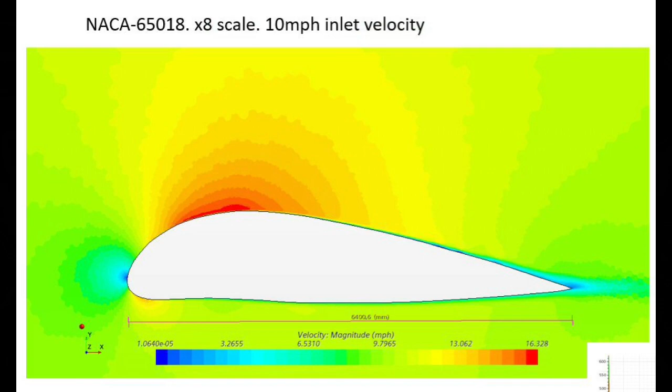The benefits of the airfoil are real.

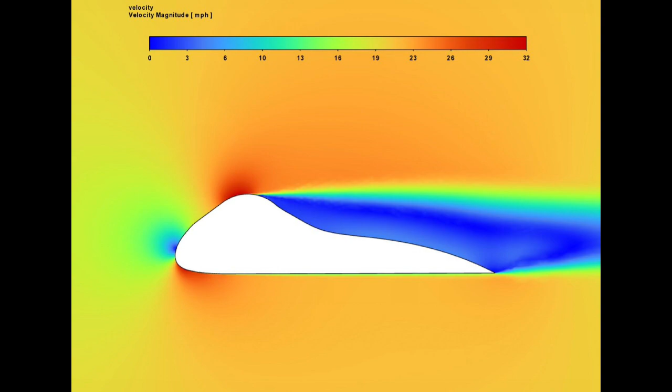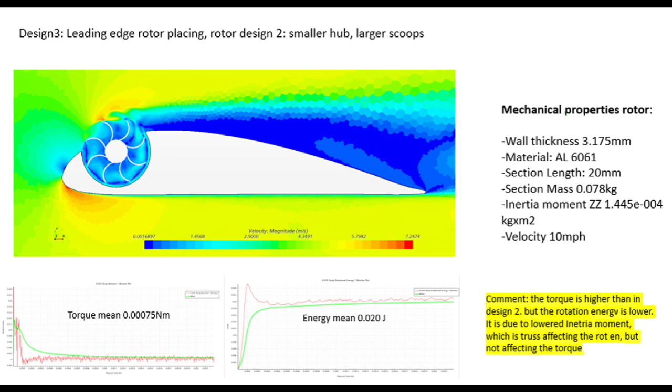These are a few of the very first tests, before we had learned what the best shape of the airfoil would be and where the turbine should be located within it. Because this was an all-new design, we had nothing to go on, and everything had to be tested and measured.

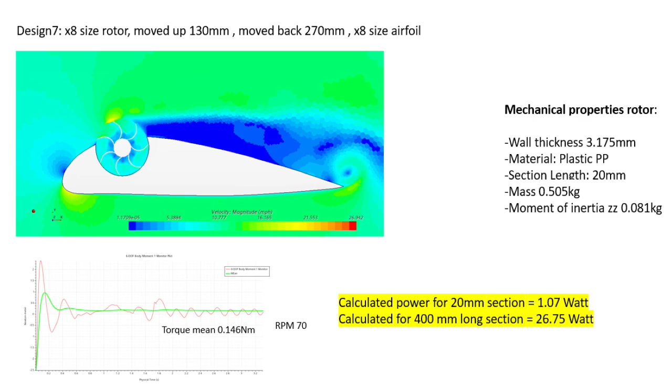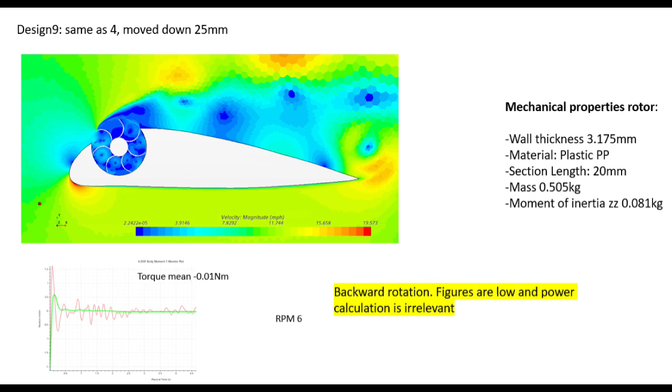Then we tested to discover how many blades the rotor should have: 3, 5, 7, or even more. For us, the sweet spot turned out to be 5. I remember this surprised us because it's counterintuitive. Without testing, you might assume more vanes would be better.

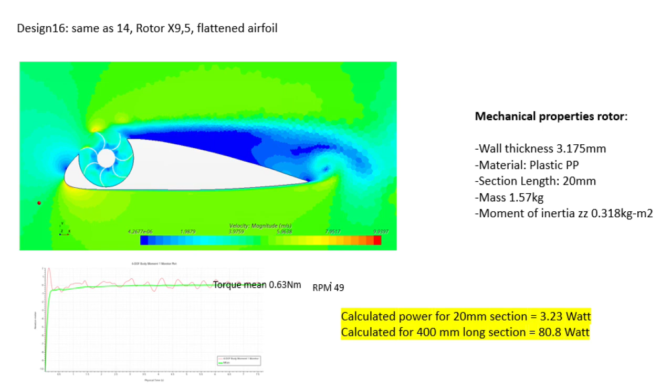You may have noticed by now that not all the tests turn out great, but that's kind of the point of testing, isn't it? So I've included some of the bad results as well as the good ones here, so you can get a truer sense of the development process.

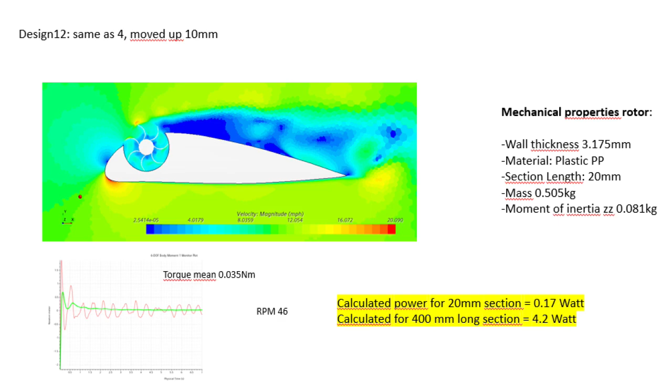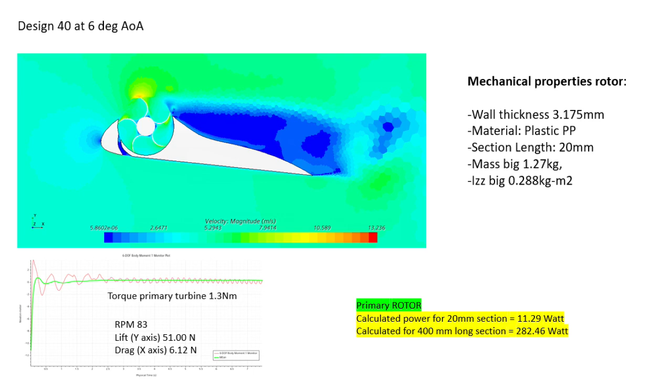These screenshots are from some of our angle of attack testing. We had designed the airfoil generator with the belief that keeping the angle of attack to 0 degrees would be best, but we ran a sequence of tests anyway, just to make sure we were right.

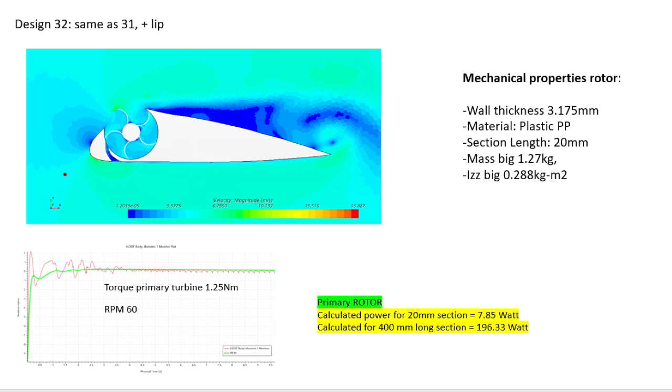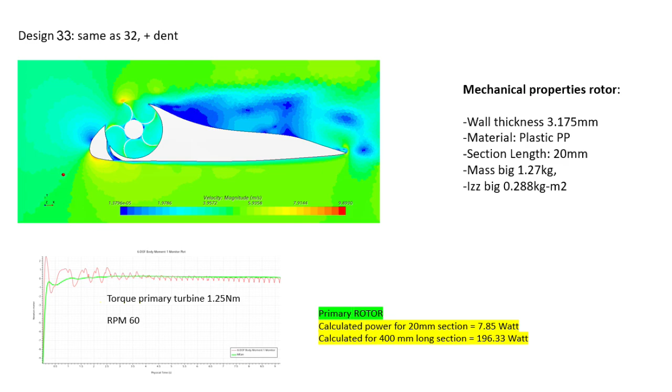The shape of the airfoil after the turbine has been a very important item for us, so we've tested different designs of it a lot. It provides us with benefits in air velocity and pressure differentials, but its best trick is to turn the turbulent air after the rotor back into a smooth laminar flow again.

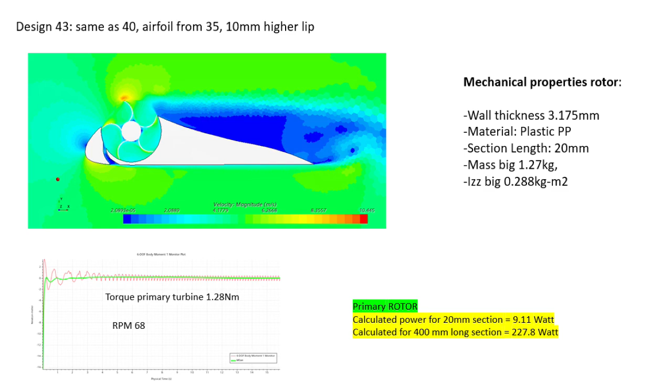The airfoil also makes the wake behind the generator as turbulent-free as we can make it, which has benefits in noise reduction and other environmental advantages.

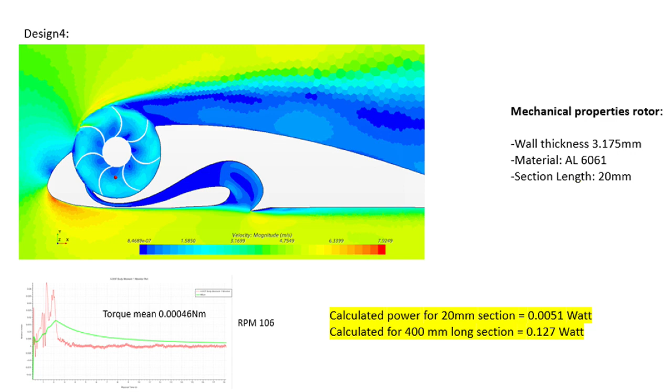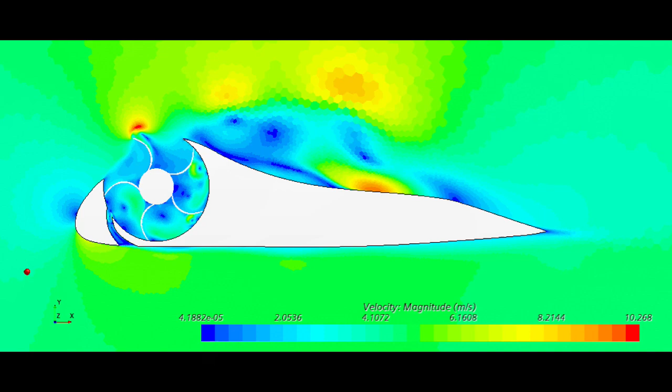Now let's look at some pressure porting screenshots. We felt there had to be a way that we could benefit from the pressure differentials on each side of the airfoil, but finding how to use them to our advantage took a long time and many tests, moving the inlet location and then the outlet into the turbine housing. After a lot of experimentation, we did find just the right setup that works well.

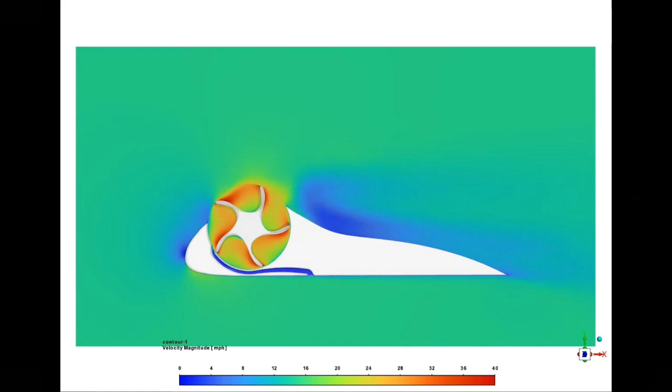We took another deep dive into the shape of the blades themselves, and here are a few screenshots of that. I have 2 patents on impellers for superchargers, and the knowledge from those experiences was useful to us here in developing the optimum rotor.

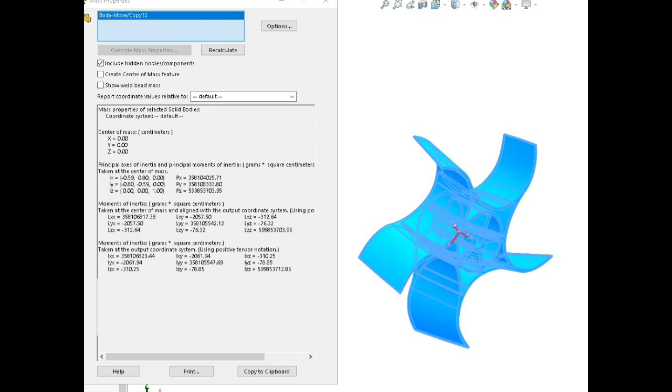All the testing we had done up to this point was with straight rotor blades. Now it was time for us to work on a helix or a twist to those blades to reduce torque surge, vibration, and noise. Finding the right amount of twist wasn't easy.

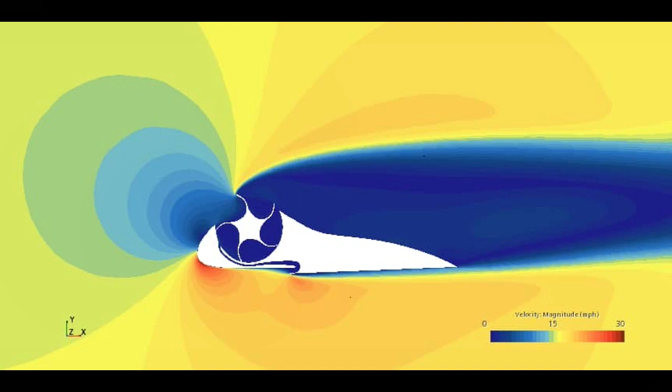I'd call this section putting it all together, if I had to name it. There are so many relationships between the parts of this design that a change to any one part had an effect on several. CFD testing was the only reasonable way to run many iterations back to back to back to separate the best ideas from all the others.

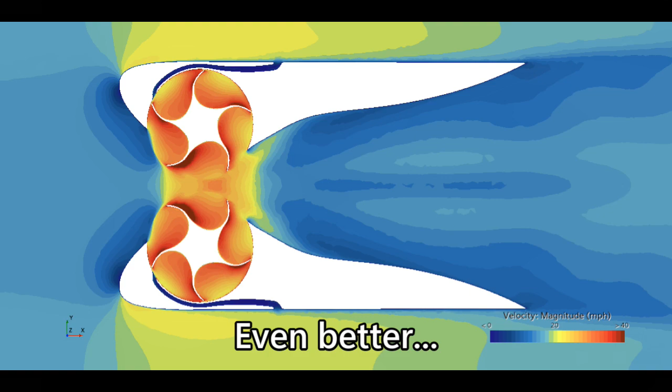Once we got the single airfoil to put out good, reliable performance figures all the time, we moved into the twins concept. I knew that the proper positioning of two airfoils could create a venturi between them, which would make the output greater than two generators alone. It does. But it took many, many tests to find that sweet spot where it really produces.

I hope you found this interesting and informative, if only to help you understand how many variables there are and how each had to be tested singly. The current design is very good and it's ready to be built, but it isn't done. It will never be done, really. There will always be an adjustment here or a new technique or material there that will make our design better. So even now, we keep engineering and testing to find them.